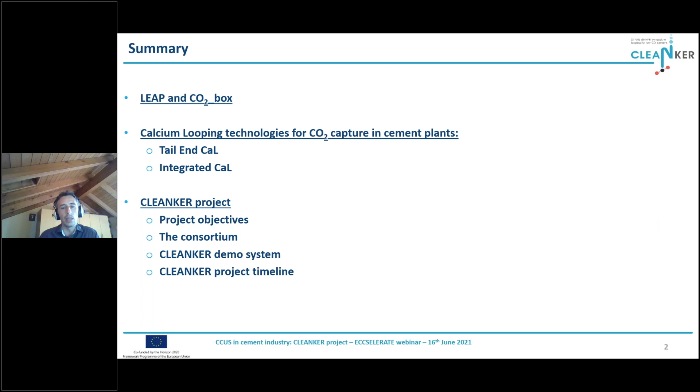LEAP stands for Laboratory of Energy and Environment of Piacenza. It is sited in northern Italy, and it is a research center that provides consultancy, technical services, and research activities belonging to 4 main topics: the first is waste to value, the second is low carbon technology, which is the area I belong to, then smart energy systems, and emission and air quality.

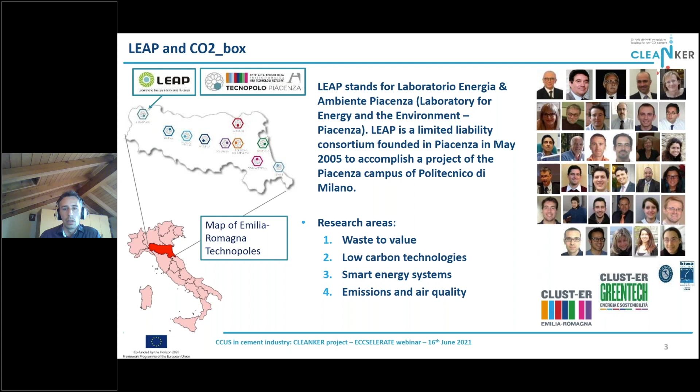LEAP researchers are actually involved in several activities related to both modeling and experimental works. In particular, experimental efforts are currently carried out either on site or in one of our 2 laboratories. The first one is the heat box, used for assessing boiler performances. The second one is the CO2 box laboratory, which belongs to the ECCSEL network.

This is a test rig for the assessment of the thermodynamic properties of CO2-based mixtures. LEAP carries out experimental campaigns to measure single-phase pressure, temperature, density properties, and vapor-liquid equilibria for CO2 mixtures. This laboratory is really related to the CCUS world, as it can be used to characterize CO2 mixture properties, giving essential information for the transport, utilization, and storage steps.

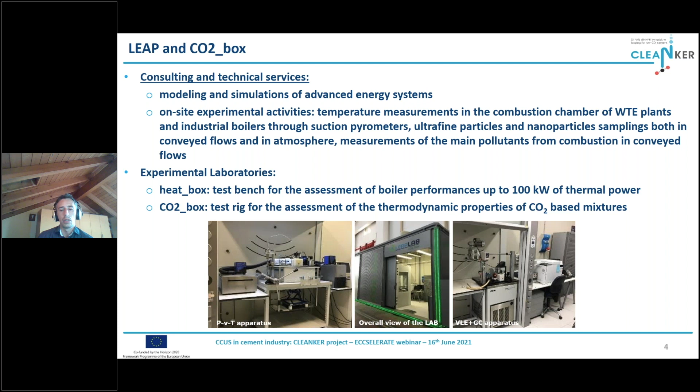As probably some of you already know, calcium looping is a promising, very well proven carbon capture technology. It is a regenerative process which takes advantage of the capability of a calcium oxide sorbent to combine with CO2, forming calcium carbonate. This happens by means of the carbonation reaction, which happens at high temperature in a dedicated reactor and also produces heat.

After the capture process, the sorbent must be regenerated in a second reactor, the calciner. The reverse reaction is the calcination, which is endothermic, and all the heat required for this reaction is provided by the oxy-fuel combustion of coal or other fuels. In this way, at the outlet of the calciner, we have a CO2-rich stream gas ready for further purification and sequestration or usage.

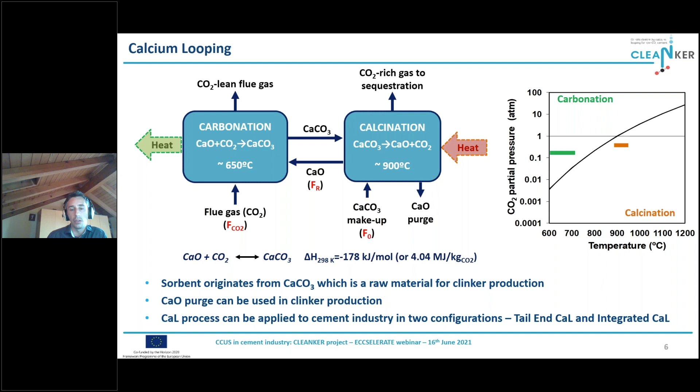The calcium looping process can be applied to the cement industry in two different configurations: the tail end calcium looping and the integrated calcium looping. Let's start with the integrated concept.

In a conventional cement plant like the one depicted here, CO2 is generated by different processes. First, we have the process CO2 emission, related to the calcination of the material. It doesn't come from combustion, but from the process itself, and it is almost entirely generated in the calciner of the cement kiln, which is the most energy intensive section of the whole cement production process.

Still in the precalciner, we have another arrow, the orange one, which is the CO2 generated from combustion within the precalciner, needed to sustain the calcination. Then we have a second contribution coming from combustion, the minor one, generated by the main burner in the rotary kiln. This burner is needed to bring the raw material to very high temperature.

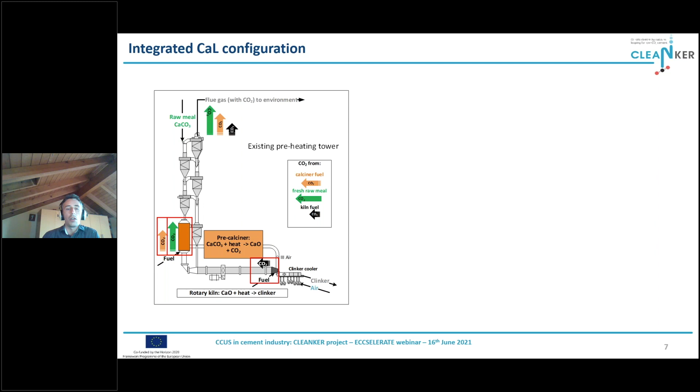And to produce clinker. So how can we apply the integrated calcium looping concept in a cement plant? First, we have to switch the precalciner to oxy-fuel combustion. The precalciner plays the double role of feeding the carbonator for CO2 capture and also the rotary kiln. A fraction of the material produced by the calciner is used directly for producing clinker, and a fraction is recycled to the carbonator.

In this way, we produce at the calciner outlet a CO2-rich gas, so we automatically get rid of the two main CO2 streams of our reference case. The residual stream coming from the rotary kiln is captured by the carbonator, which plays the only role of capturing this final, residual amount of CO2.

The main peculiarity of this system is that the sorbent used for capturing CO2 is the same material used for producing clinker. Since this material has a very small particle size, from 10 to 20 micrometers, we have to use entrained flow reactors, which is a different technology from the conventional fluidized bed system considered for the calcium looping process.

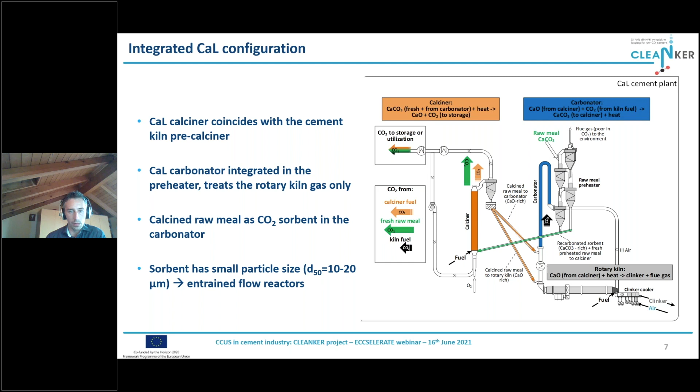In the tail end case, the configuration is more simple. The calcium looping CO2 capture process is placed downstream the clinker burning line. It is actually an end of pipe application where the carbonator treats all the flue gases exiting the cement kiln, so all the flue arrows that I showed before.

Again, also in this case, the calcium oxide rich purge produced by the calciner can be used as raw meal for feeding the cement kiln. The higher the makeup within the calcium looping process, the higher the integration level between the capture process and the system. Since this system is the more conventional calcium looping one, it is based on circulating fluidized bed reactors.

For this reason, the particle size is higher than the size of the conventional cement raw meal—one order of magnitude higher. So the sorbent purge, before being fed to the preheating tower and to the kiln in general, has to be milled in a cement raw mill at low temperature and then heated up again within the kiln process.

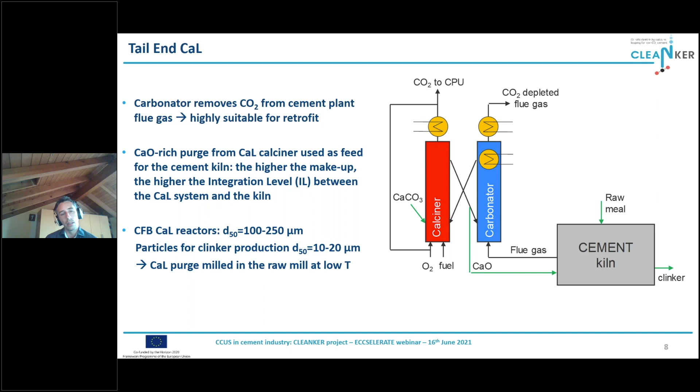One feature of all the calcium looping processes is that their application involves additional fuel consumption. But the advantage of this capture process is that heat can be recovered at high temperature, because the carbonation happens at 650 degrees Celsius. So we can exploit the high operating temperature of both reactors for producing valuable steam and electricity.

In our simulation works, we optimized the parameters of the integrated steam cycle and also the structure of the heat exchangers network to maximize the electric efficiency for all the configurations that we tested.

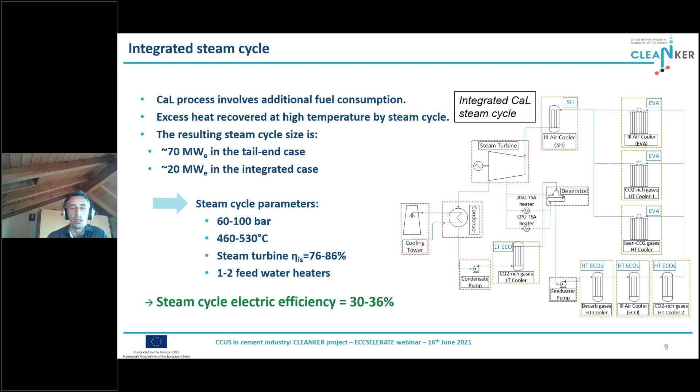Both the tail end and the integrated calcium looping configurations were simulated in the CEMCAP and the CLEANKER European projects, exploiting both 0D models developed with commercial software, coupled with more sophisticated one-dimensional routines developed, for instance, in MATLAB, for the simulation of the calcium looping reactors, both the tail end fluidized bed system and the entrained flow configuration.

Here, just as an example, you have the resulting capture efficiency for the entrained flow carbonator as a function of the reactor length. This has been calculated by a one-dimensional model developed in MATLAB, capable of solving mass, energy, and momentum balance.

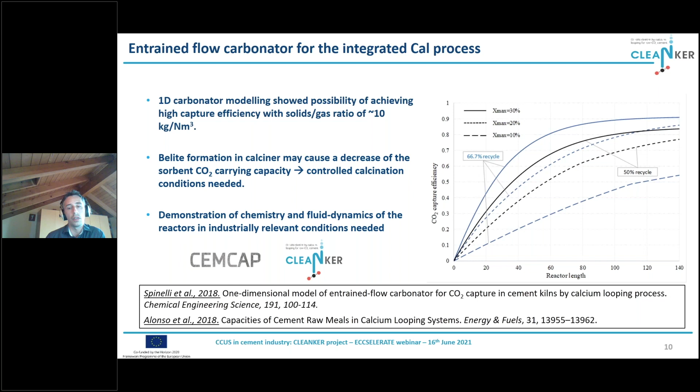As you can see, in order to achieve a significant CO2 capture efficiency, we need a very long reactor. This is mainly due to the high superficial velocity we have in entrained flow systems, up to 15 meters per second, but also the kinetics of the carbonation reaction.

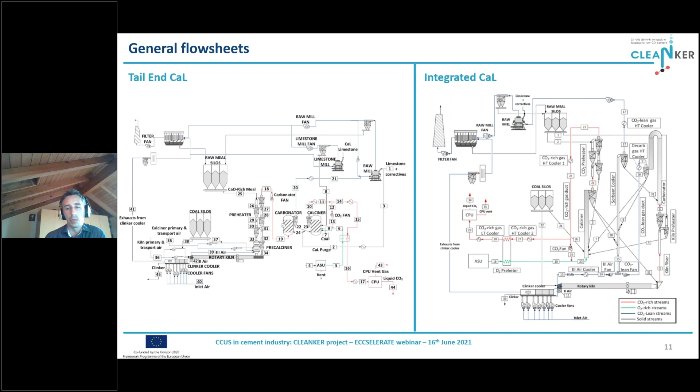Simulation results of one-dimensional reactor models and the optimized steam cycle were imported into the overall zero-dimensional model, which reflects the scheme presented for the tail end and the integrated case, to obtain the final performances. Without going into the detail of the assumptions and configuration of the two schemes, we can skip to the results, showing the three main KPIs we can use to characterize these two systems.

The first KPI is the equivalent primary energy consumption, which takes into account both the direct fuel consumption within the cement plant equipped with the calcium looping system, but also the indirect fuel consumption or fuel saving due to the fact that the system exchanges electricity with the grid. In some cases it imports electricity; in some cases there is an export of electricity to the grid. The same logic applies to the second KPI.

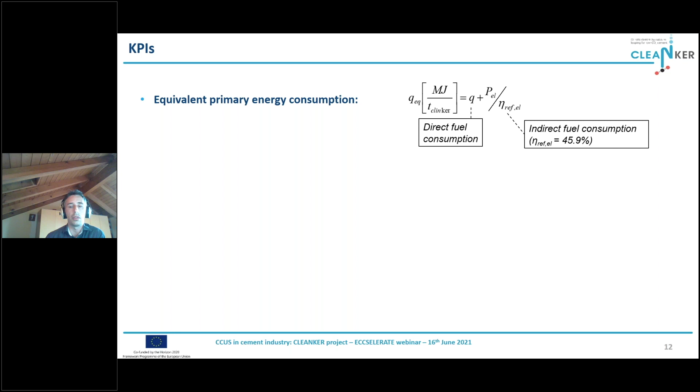In the second KPI we have the same logic: this is the equivalent CO2 emissions, which takes into account the contribution of the indirect emissions, or the avoided emissions, due to electricity import or export. Finally, we have the SPECCA index, which is the main parameter used to characterize the performance of carbon capture systems, indicating the primary energy required to avoid the emission of 1 kilogram of equivalent CO2.

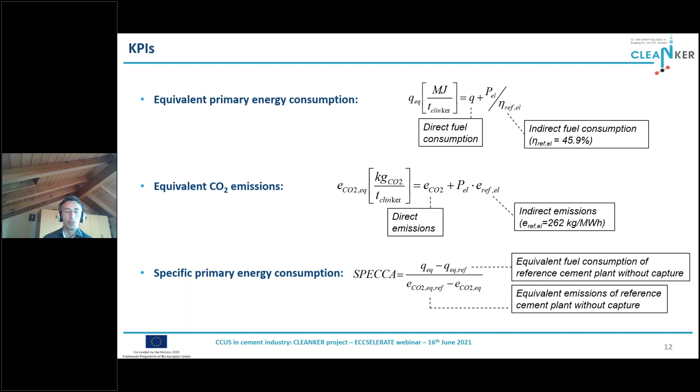This is mainly related to the low thermal integration with the host cement plant, and also to the effect of the double calcination. Indeed, each CO2 molecule captured by the tail end system experiences a first calcination in the cement plant calciner and a second calcination in the downstream calciner of the calcium looping facility, which is a penalty for the system.

On the other hand, the higher the fuel consumption, the higher the thermal input. And the higher the thermal input and fuel consumption, the higher the electricity we can produce by recovering heat from the CO2 capture system.

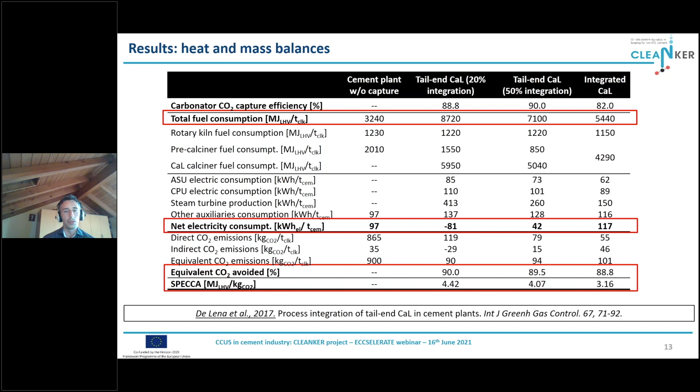As you can see, for instance in the first tail end case with 20% integration, we have an export of electricity. As for the equivalent CO2 avoided, all the systems approach 90%. As for the SPECCA, the best value is given by the integrated calcium looping.

As for the economics, in this chart we have the breakdown of the cost of CO2 avoided, which spans from 52 up to 55 euro per ton of CO2 for the configurations envisaged. As you can see, even though the tail end options take advantage of revenues related to power export compared to the cement case without CO2 capture, the difference in overall cost of CO2 avoided between the tail end and integrated case is very low.

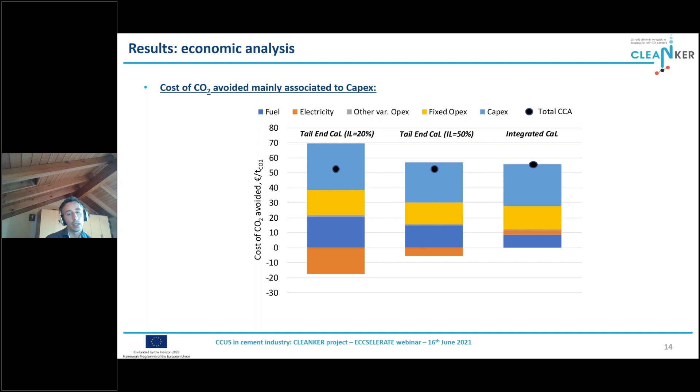The reason for this is again related to the higher efficiency of the integrated CaL concept. So in a general comparison between the two CaL processes, we can say both technologies are promising in terms of efficiency and cost of CO2 avoided.

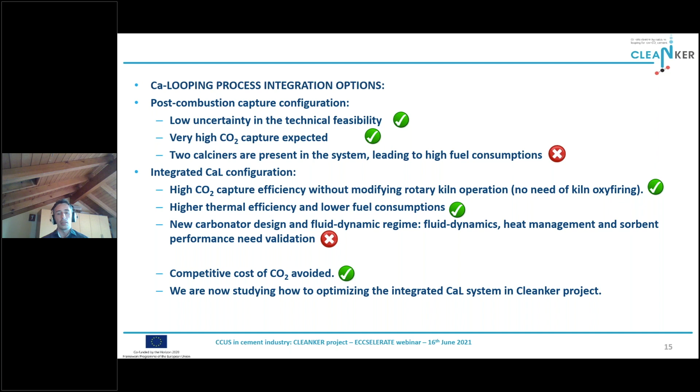In particular, the tail end case has good perspective in terms of retrofitability, technology maturity, and capture efficiency. But it has the inherent disadvantage of the double calcination discussed before, which gives the process an energy penalty. For this reason, the integrated option features higher thermal efficiency, still with promising capture rates, but on the other hand it requires the introduction of a different kind of reactor, which is currently experimentally proven in the Cleanker project.

Let's have a quick overview of the Cleanker project, which is a Horizon 2020 project coordinated by LEAP. The ultimate Cleanker goal is advancing the integrated calcium looping process for CO2 capture in a real cement plant. The facility selected for this purpose is a Buzzi Unicem cement plant located in Vernasca, in northern Italy, close to Piacenza.

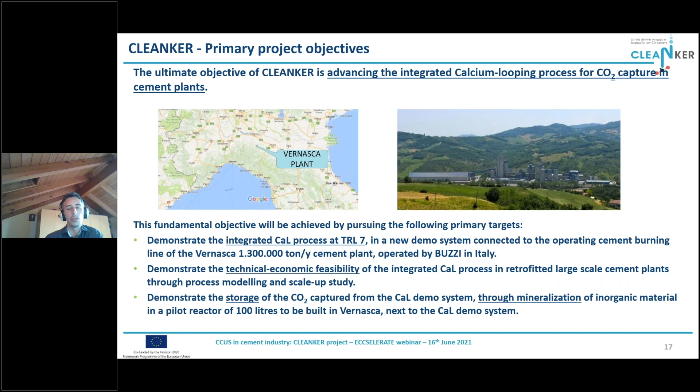Besides working on the main topic, the demonstration of the CO2 capture systems, we are also making efforts in experimental activities, process simulation, and optimization activities. We will also test and validate CO2 utilization for the mineralization of inorganic material, which can be considered a valuable storage option.

So here we have some general information about the project and the consortium. Cleanker takes advantage of a really competitive and skilled partnership composed by cement industry players, technology providers, research institutes, and university from the whole Europe.

The activities in the first 2 years were dedicated to the design of the plant and to experimental campaigns carried out in specialized laboratories to validate the performances of cement raw meals as CO2 capture sorbents, and also modeling activities. The simulation activities supported all the design phase, providing mass and energy balances for the pilot plant, but also fluid dynamic computations. Simulations are being used to improve the full-scale performances, optimizing other sections of the plant, such as the cryogenic purification unit.

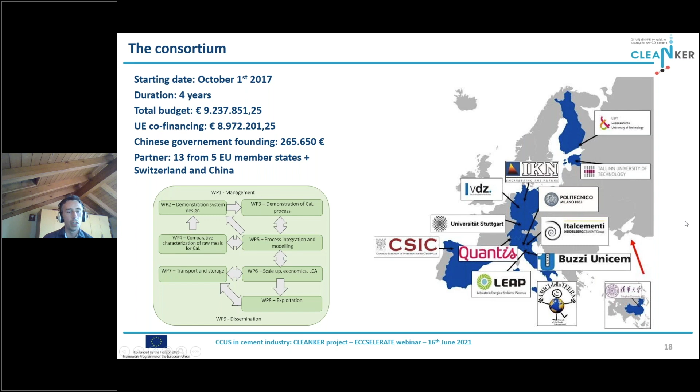On the left, you have the structure of the work packages.

Here we have the project's original timeline. The first period was dedicated to engineering activities. We produced hundreds of drawings and also tens of flow sheets that were continuously revised. Then there was the plant erection, and due to some technical delays, mainly caused by the pandemic situation, we asked for an extension of 6 months. So in the end, the project will last 4 years and a half.

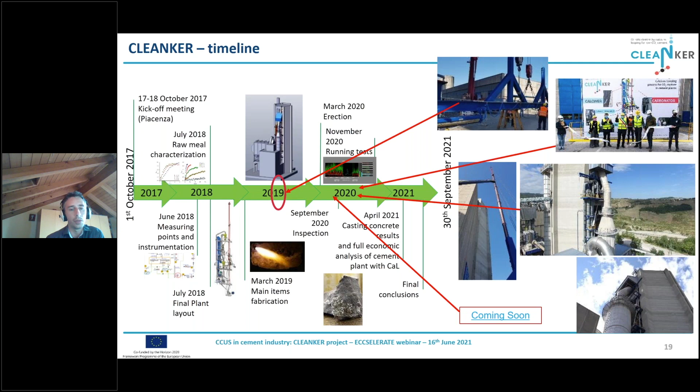Let's have a look at the configuration of the pilot plant. This is a TRL7 pilot plant, and as you can see, it looks quite different from the full-scale integrated calcium looping concept discussed before. It is composed of 2 separate entrained flow reactors, the carbonator and the calciner, which are designed to treat only a slipstream of the host cement plant exhaust.

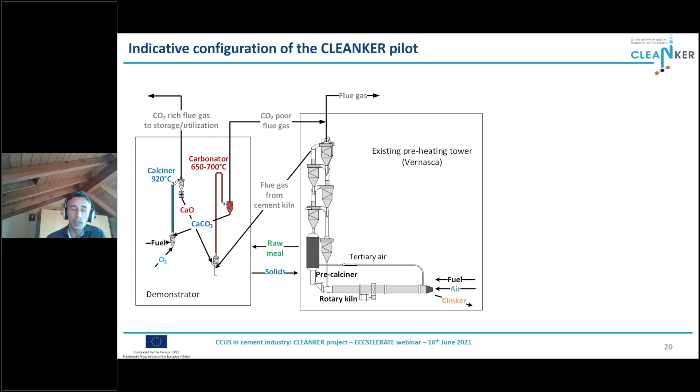The original concept was quite simple, just the 2 reactors basically. But during the design phase, we were pretty ambitious in adding components to represent as much as possible the behavior of a future full-scale application. For instance, the carbonator has the possibility of recycling some sorbent from the carbonator outlet to the carbonator inlet, to improve capture efficiency without increasing energy consumption in the calciner. The calciner is equipped with a preheating stage, a riser cyclone preheating stage similar to what we have in a conventional cement kiln.

This is again for reducing fuel consumption in the calciner. Also in the calciner we have CO2-rich gas recirculation, which can be used to tune the properties of the oxidant mixture.

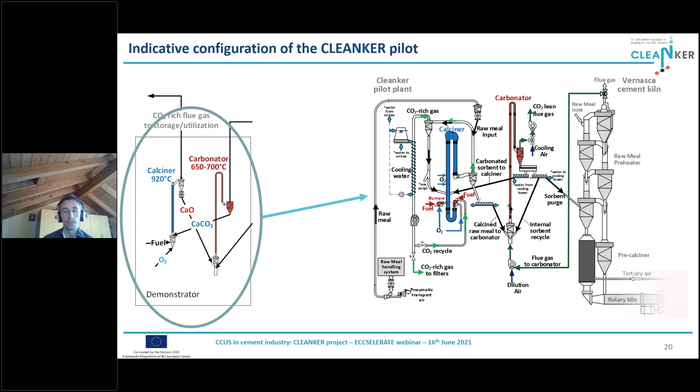Let's skip to some pictures of the real Vernasca cement plant. Here you can see the full cement plant and the preheating tower before the installation of the integrated pilot. And here we have the rendering of the pilot and of the preheater plus the pilot bolt-on.

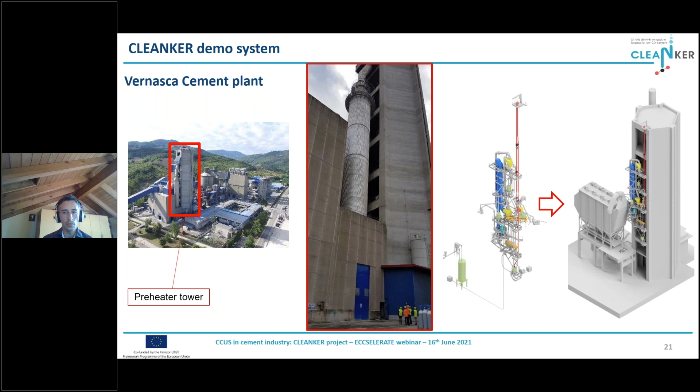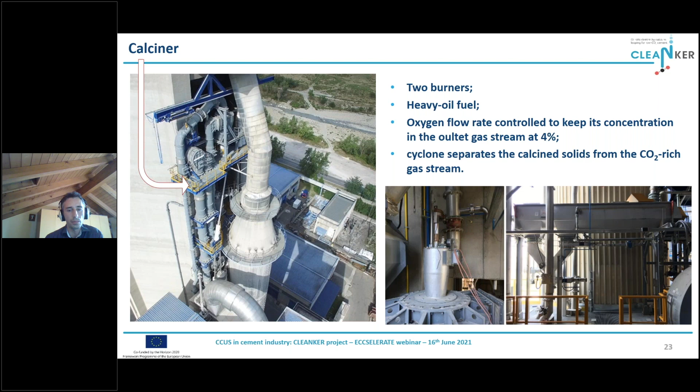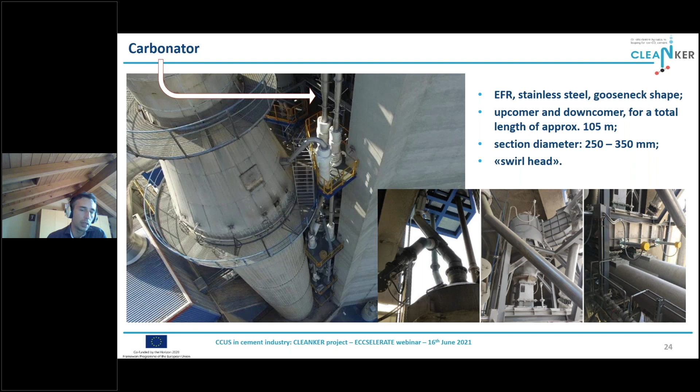We will test variable operating conditions in the calciner and in the carbonator, especially focusing on the most influencing calcium looping parameters, such as the sorbent excess, or in other terms, the solid to gas ratio within the carbonator, which is a key parameter for both the CO2 capture and the energy performance of the system. So we really put a lot of effort into reaching stable operation of this pilot, and we are now capable of managing the pilot pressure balances, handling sorbent, and stabilizing the heavy oil combustion in a dust-rich environment, etc.

So we are now ready for a complete test, and I'm pretty confident that in the coming weeks we will have the first indications about the real performance of this system.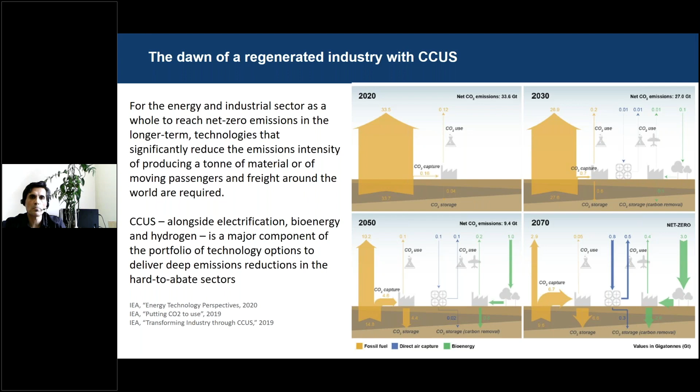CCUS, as you know, is a class of technologies which are able to reduce CO2 in existing energy and industrial plants, but also in future sectors where CO2 is hard to abate. CCUS technologies are also a platform family of technology for clean hydrogen production, or even for removing carbon from the atmosphere in order to balance any potential CO2 emissions which are hard to abate, like in shipping or in aviation and so on.

Among the hard-to-abate industries, as you already know, cement is one of those, along with steel. Both industrial sectors are responsible for up to 15% of global CO2 emissions. Unfortunately, this emission cannot be avoided with renewable energy, because it is a process-related emission. As Maurizio said, CO2 in cement is released from calcination of calcium carbonate in order to produce calcium oxide, which is a raw material for clinker production.

But not only the cement industry uses limestone as a raw material. The steel industry, in fact, remains the second major consumer of lime in Europe. For example, in 2017, it was estimated that about 20 million tons of lime were produced, out of which approximately 40% is consumed by the iron and steel industry.

So as we are in the age of circular economy, the idea behind calcium looping is to use the same material for capturing CO2. So we use calcium oxide to capture CO2 and produce calcium carbonate, and then release it.

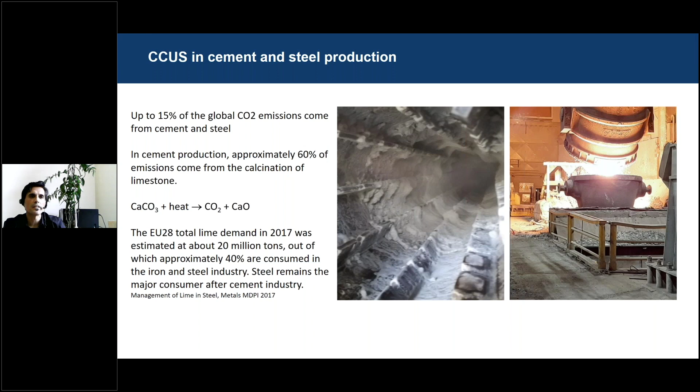For CO2 capture, absorption is the industrial standard option due to the proven applicability with solvents like monoethanolamine. But unfortunately, this chemical suffers from the presence of oxygen. In fact, in presence of oxygen, amine can form a toxic compound like nitrosamine.

So calcium looping seems to be an environmental benign alternative to the absorption stripping process.

So the water gas shift, which is the reaction of CO with water steam to produce CO2 and hydrogen, can be coupled with the removal of CO2 by calcium oxide. The net result of these two reactions are calcium carbonate and hydrogen, which can be used as a fuel or as a reducing agent in the steel industry.

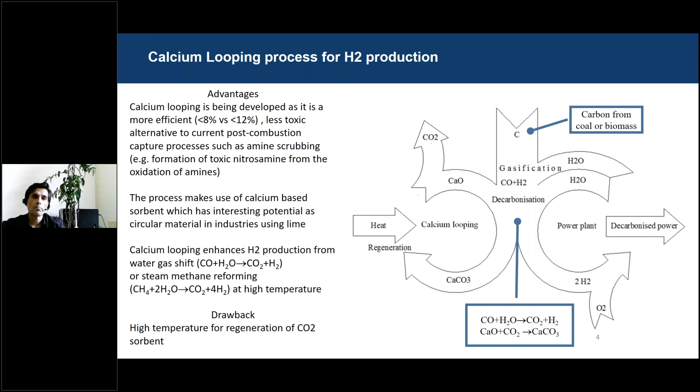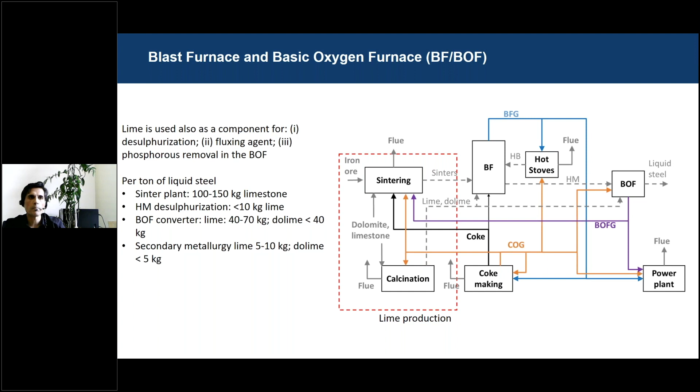The hot metal produced in the blast furnaces is sent to the basic oxygen furnace, where it is converted into liquid steel. The alternative option to the blast furnace basic oxygen furnace, BF-BOF, is the DRI-EAF, the direct reduced process coupled with electric arc furnaces.

The idea behind this alternative process is to remove the oxygen from the iron ore directly in a solid state. The solid product coming from the shaft furnaces is sent to the electric arc furnaces, where it is converted again into liquid steel and then into secondary metallurgy.

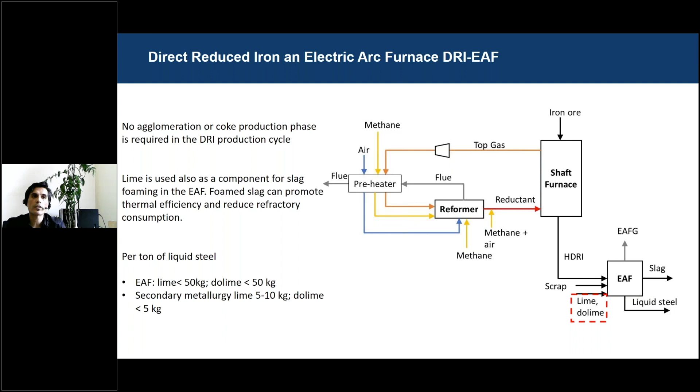Here, conversely to the BF-BOF cycle, in the DRI-EAF there is no need of sintered material, so this process is inherently more efficient compared to BF-BOF. But we still need lime to protect the inner part of the electric arc furnaces, and also to form a kind of foamed slag to prevent damage to the inner part and to protect the liquid steel from the atmosphere. So lime plays a key role in this case too.

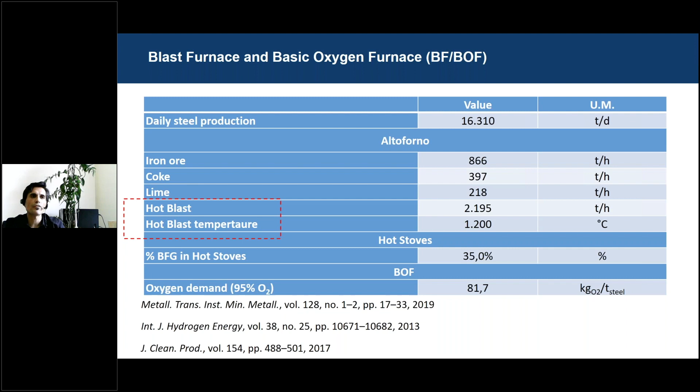The hot blast refers to the preheating of air blown directly into the blast furnaces. Part of the blast furnace gas leaving the steel mill is used to preheat the air, along with some additional methane.

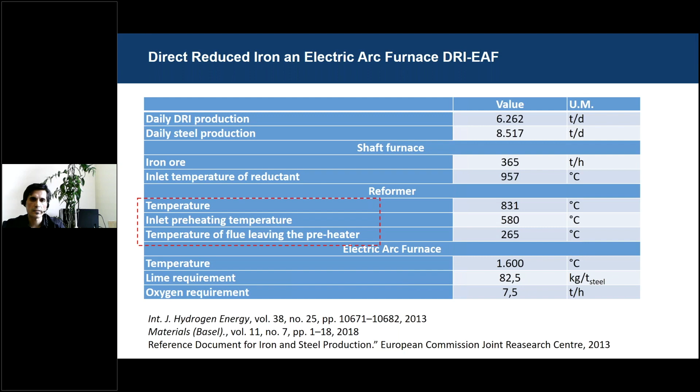Let's see how this configuration will react to the integration of calcium looping.

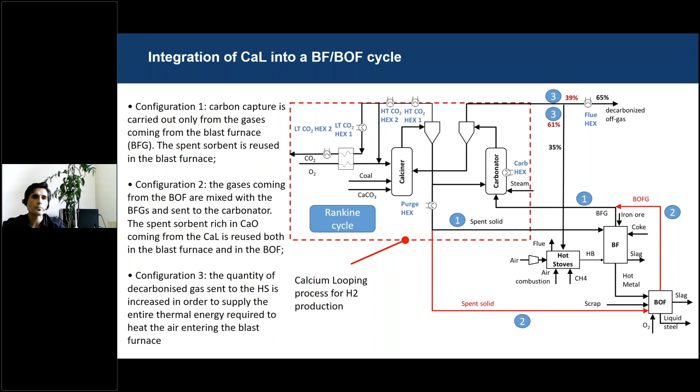But we can also recover part of the energy from the carbonator, because in the carbonator there is heat released by the reaction of CO2 with the calcium oxide. Let's see how the energy and mass balance looks.

This means that with this configuration, we are able to export excess power from the steel industry to the power grid. This is a similar aspect that you have already seen in the previous presentation.

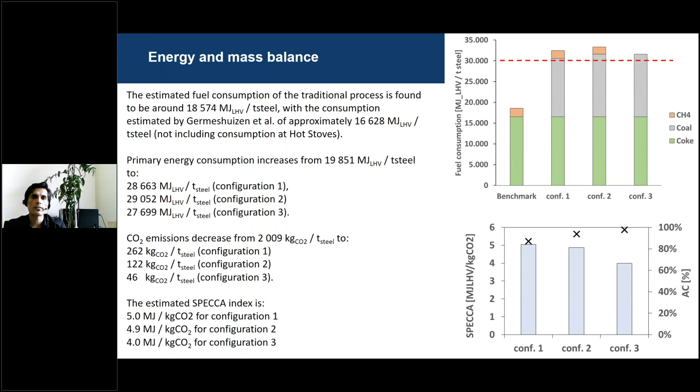With regards to the economic analysis, we have also considered the specific cost for decarbonization, which is the ratio between the increase in the cost of the total plants to the annual production in terms of ton of steel per year. And we have evaluated also the cost of carbon avoided, which is the ratio of this value to the carbon avoided.

We have completed the mass and energy balance also with carbon footprint based on LCA analysis. The functional unit we have used is the well-known equivalent CO2 emission, so it's a kilogram of CO2 equivalent. All relevant emissions, such as methane and so on, are converted by applying a corresponding factor in order to estimate and calculate the global warming potential.

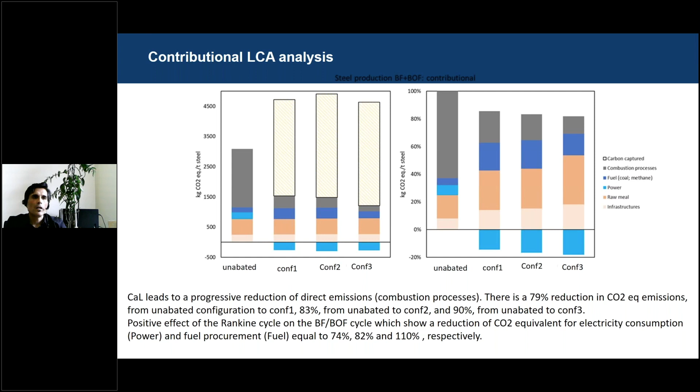Let's see also now for the configuration of the DRI coupled with the calcium looping. We have considered configuration 4, which takes into account the decarbonization of flue gas leaving the reformer, which produces the reductant.

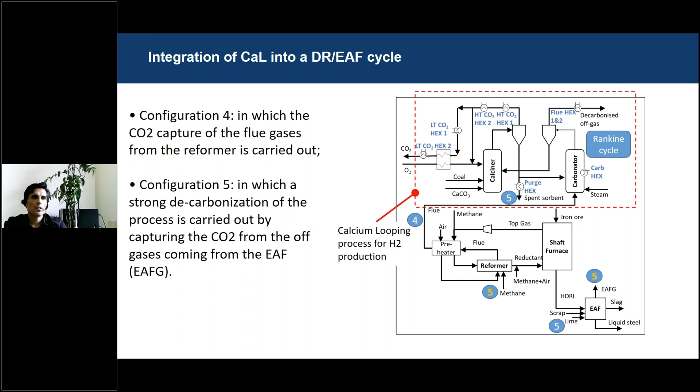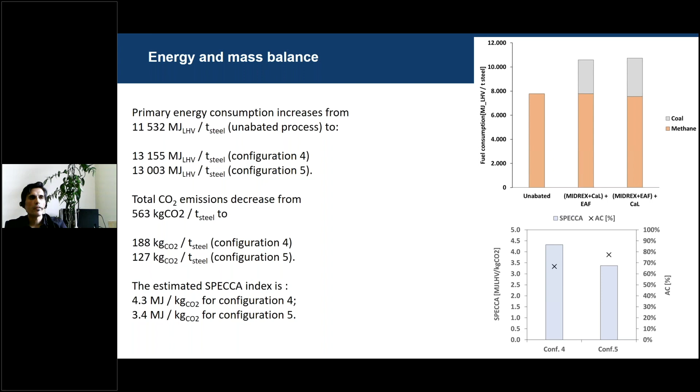Nevertheless, the SPECCA index is lower, because for configuration 4 we have 4.3 megajoule per kilo of CO2. Instead, for configuration 5, which is the most integrated solution, the SPECCA is lower still. So it means that the last configuration seems to be a very efficient configuration.

Again, for the economic analysis, the cost of CO2 increases a little bit. We have more CO2 avoided, which is greater, more than 60%.

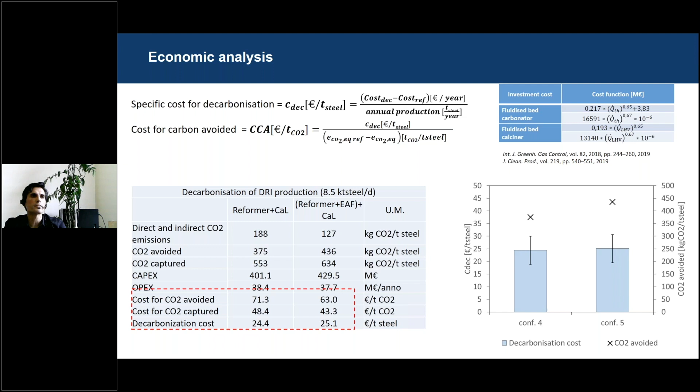And the decarbonization cost is lower, more than 24 euro per ton of steel. So also in this case, we have completed the mass and energy balance with the LCA. Again, this confirms that there is no export of power from the steel mill to the power grid, but nevertheless we have a reduction of CO2 related to the combustion process.

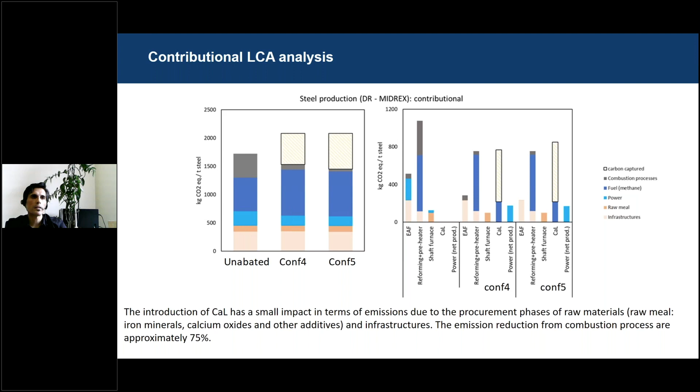A few words to say that if we want even deeper decarbonization in industry, in general we have to encourage renewable energy sources also in industry, and calcium looping can help in this regard. In fact, it can offer an optimal solution to collect solar energy into the calciner with this reaction.

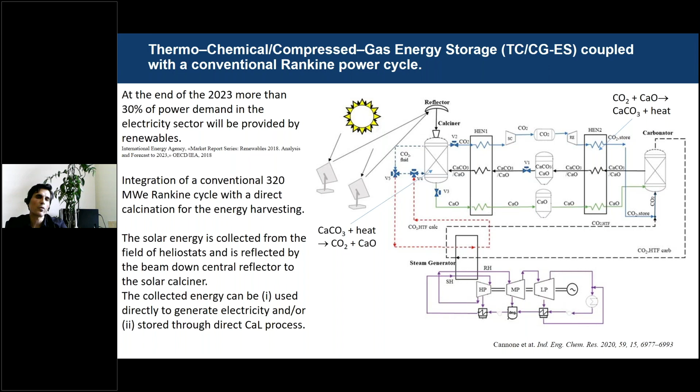Calcium carbonate decomposes into CO2 and calcium oxide. The CO2 is stored in a supercritical way in a pressurized tank, and the calcium oxide in a conventional silo. These components can then be reused in a carbonator in order to release heat, and so feed a classical Rankine cycle with high, medium, and low pressure stages.

The energy storage system is composed of the calciner itself, but also the compressor unit, which is able to store the CO2 in a supercritical phase. We have approached the integration, or recovery of excess heat, with the help of the well-known pinch analysis.

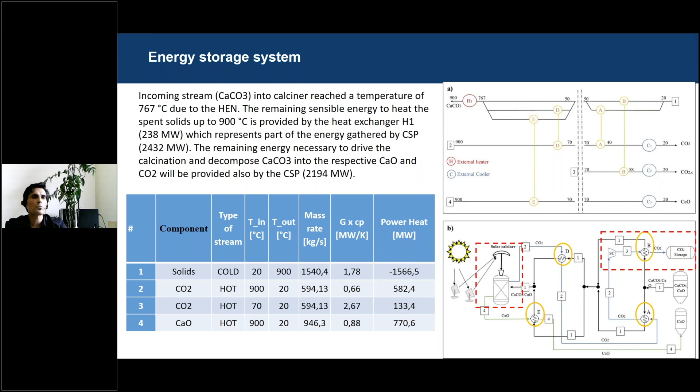We have highlighted in particular 3 hot streams, which are the CO2 released in the calciner, the calcium oxide produced in the calciner, and the CO2 leaving the storage compressor. The only key cold stream is the calcium carbonate, which feeds the calciner.

A similar approach applies to the energy release area. This is composed of the carbonator, which releases the heat, and the CO2 storage tank, where the energy can be recovered by a train of turbines, so we can recover part of the compressor work.

The heat is mainly supplied via these 4 exchanger units. We have this vaporization which helps to maintain as constant as possible the temperature inside the carbonator, because this is an exothermic reaction, so we are able to produce heat, and then the remaining part of the heat is...

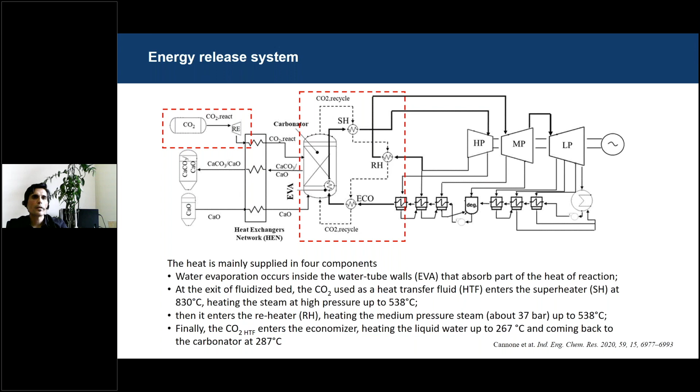...released by the CO2 leaving the carbonator in this closed loop, so we can have a superheater, a reheater, and an economizer.

The most important feature of calcium looping as a storage system is the potential applicability also to district heating networks. In fact, for the intercooled compression of CO2 during the gathering of energy, cooling is necessary in order to maintain as constant as possible the temperature of the gas during compression.

So we have modeled a refrigerant circuit which is able to absorb the heat during compression and release the same quantity in a district heating unit.

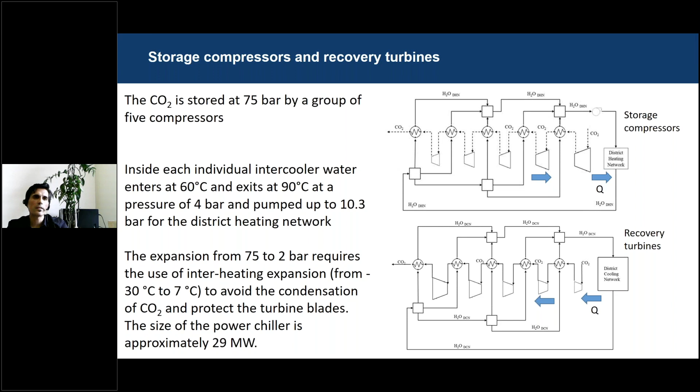During the recovery via turbine, when the CO2 is released through the carbonator, we have the opposite need, so we have to heat the CO2 because expansion can cool it down with potential condensation of droplets. So we need a heating circuit able to heat up the CO2 and absorb this heat in an external volume, producing cooling.

This is just to give you a flavor of the summary; we have published a full paper on that. We see that if we consider in the global efficiency also the heat and cooling district, the global efficiency increases from 40% to 50%. So calcium looping also gives the possibility to be hybridized and integrated with other storage systems, like mechanical ones.

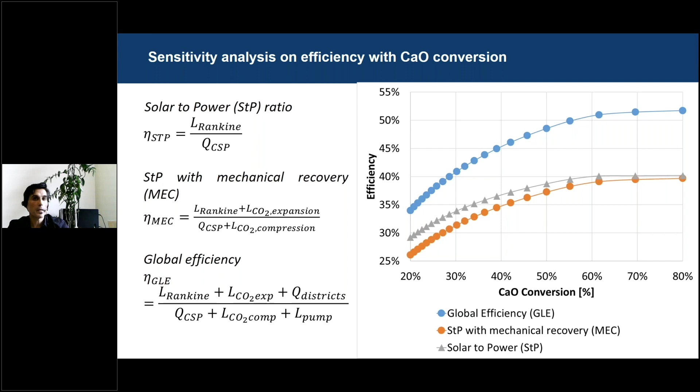I want to complete this presentation by showing you the ZECOMIX pilot plant. I'm proud to say that it belongs to the ECCSEL Consortium. This is a 500 kilowatt pilot plant. ZECOMIX stands for zero emission of carbon with mixed technologies. The aim of this pilot plant is to produce hydrogen with the calcium looping process.

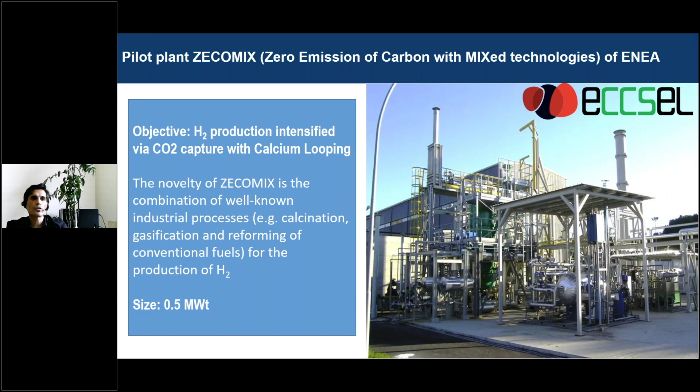The novelty of ZECOMIX is the combination of well-known industrial processes like calcination, which we borrow from the cement industry but also from steel, with gasification and reforming of conventional fuel for producing hydrogen. Here I report the composition of syngas produced by a bubbling fluidized bed.

As I told before, this is a 500 kilowatt thermal bubbling fluidized bed, and in this reactor we are able to simulate any composition similar to the gas leaving the blast furnaces or even the basic oxygen furnace. So we can replicate the same conditions of the gas leaving a steel mill, and get a figure and an estimation of how efficient calcium looping is for the decarbonization of steel mills.

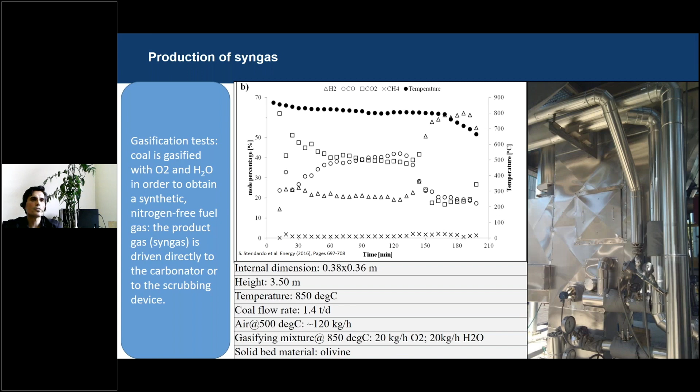Particularly here you can see the composition of the gas leaving the carbonator. We have simulated this inside the carbonator, which is a bubbling fluidized bed, 5 meters high with an inner diameter of 1 meter.

In this experimental campaign, we fluidized 200 kilos of dolomite with a mixture gas composed of 10 kilograms per hour of CO and 50 kilograms per hour of H2O, in order to simulate the water gas shift intensified with the capturing of CO2.

This was a very explorative experimental campaign, but nevertheless we were able to attain good results, because the gas leaving the carbonator has hydrogen content oscillating between 50 and 60% on a dry basis. The remainder is composed of unreacted...

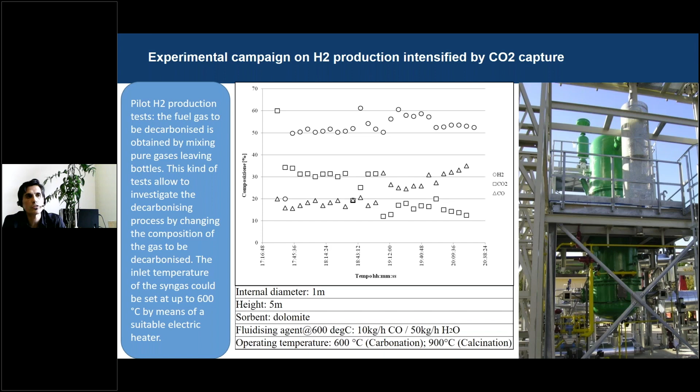CO and CO2, which would not be able to be captured, because the calcium oxide would convert it into calcium carbonate. This means that we have to add more calcium oxide in order to lower the content of CO2.

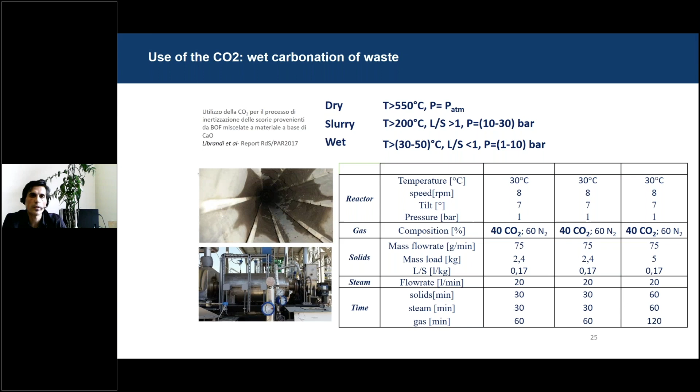which are able to be carbonated, and so to be used as a storage of CO2. This is a freshly baked result from the Zecomix, because Zecomix is a wider infrastructure.

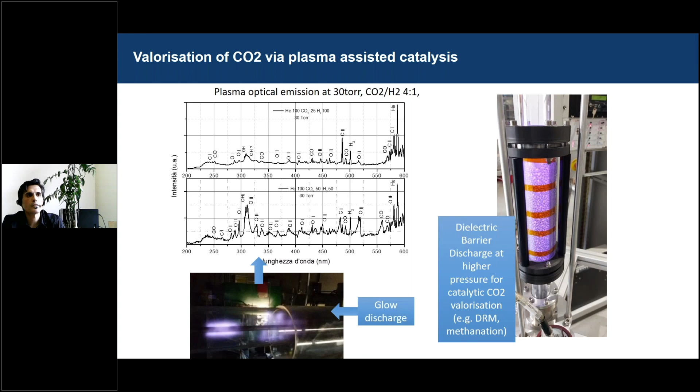The idea is to use advanced materials as a catalyst, assisted by plasma, in order to split the CO2 into CO and oxygen at lower temperature.

In particular, during this talk, I have reported the main results obtained jointly with the Politecnico di Torino, inside work package 1, focused on the evaluation of efficiency and performance of the steel and cement industry.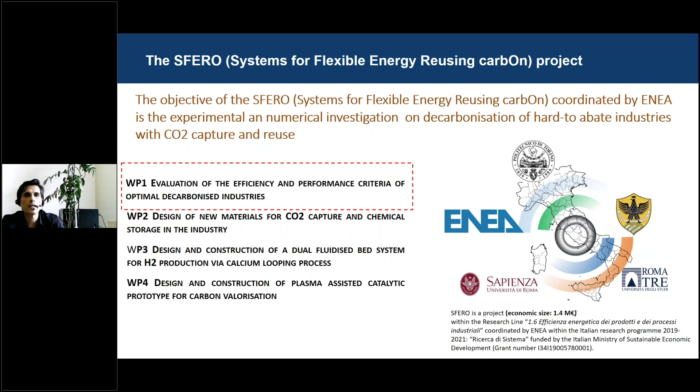You can produce hydrogen as a fuel, or as reducing gas in the steel mill, or for replacing methane or other conventional fuels. You can produce calcium oxide as a raw material in cement, or as you can see also in the steel mill.

Or, but this is another chapter, you can use the calcium oxide from the calciner in slaked lime, just to assist direct air capture. So you can also absorb the CO2 with this kind of process, even the CO2 from the air. This is a very challenging aspect, but also the industry world is facing this kind of process.

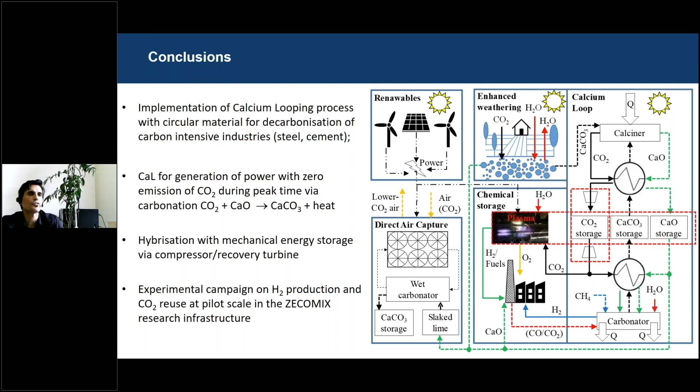Well, thank you for your nice presentation. What I learned more today is that a form of energy storage is also in this technology, which is a very interesting thing.

We have, I think, in terms of timing, one question. That is for Dr. Spinelli, about the cost of CO2 capture. I think there should be some more elaboration on that, because according to the ANICA project by TU Darmstadt, they had lower capture costs. So maybe you can elaborate on that, Dr. Spinelli.

Yes, I don't know right now the assumptions that were made for estimating the cost of the CO2 capture system, so the indirect calcium looping system of the ANICA project. So I could not make a straightforward comparison. But what I can see is that the costs I showed were calculated in a previous project, the CEMCAP project, and in my opinion we had some, let's say, conservative assumptions, both economic and technical, related for instance to process contingencies.

This was unexpected at the beginning, but the cost for building, the civil works for building that tower, were quite high, comparable to the air separation unit or the CPU system. But again, these are costs really related also to the location of the plant. So we have some margin to reduce both the equipment cost and also the operating capex and opex.

It's very clear, and there's room for optimization and to improve efficiency, or at least the CO2 cost avoided. Yeah, Michela, I think we are over time. Do you have some last words?

If I may, I would have a few quick questions to Stefano and Maurizio. If Stefano is still with us, I know we are running out of time a little bit, but I would like to ask Stefano what are the bad and the good things of calcium looping technology, and why is it not so extensively affirmed yet at a commercial scale, if you may answer?

The main advantage maybe is the fact that this is an environmentally benign solution, because calcium looping uses calcium carbonate, which can be a naturally occurring sorbent. But unfortunately, if we use a calcium-based sorbent from naturally occurring material, this is very poor in mechanical resistance, so a lot of fines can be produced.